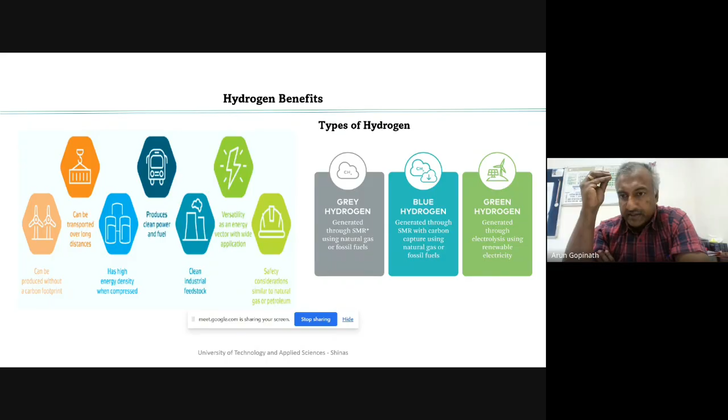But later on, with new techniques of carbon capturing schemes, they took SMR further, incorporating carbon capturing schemes into the hydrogen generation strategies. It is called CCUS: carbon capturing, utilization, and storage. If this technology is incorporated into the hydrogen generation strategy, such generated hydrogen we call blue hydrogen.

And the last one: obviously we know that if you want to call a hydrogen green, it should not contribute any carbon dioxide emission as such. That's why when we do electrolysis just with water, by giving DC electricity, you can do that electrolysis, and finally the outcome will be hydrogen as well as oxygen. This is the very green way of generating hydrogen. Now this hydrogen which comes out from the electrolytic process is very pure, with some water content or moisture content, but other than that, it is the purest form of hydrogen we will get.

If you look at the benefits, it can be produced without any carbon footprint. It can be transported over long distances as a gas or as a liquid. It has a high energy density when compressed as a gas, and it produces very clean power and can act as a fuel too, and it's a clean industrial feedstock. Industrial feedstock means it's not only for power generation, it can contribute to heating, industrial processes, and other things. So it's a very clean industrial feedstock, we can call it.

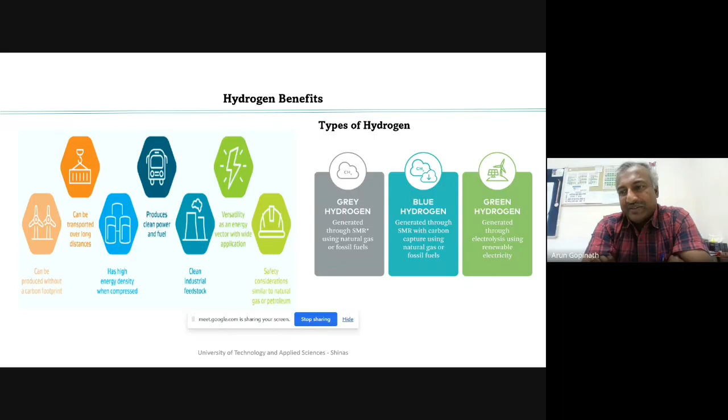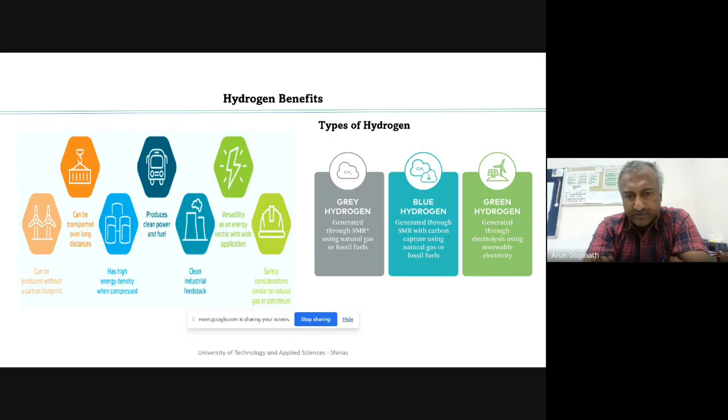The safety considerations are one of the burning topics we have to deal with. When hydrogen is there, it's highly flammable. So we have to follow safety considerations, and it is almost similar to that of natural gas or the petroleum products which we are dealing with now.

Now, sector-wise application, if you are asking, the hydrogen can be dealt with for the feedstock applications as well as the energy applications. As I mentioned before, it can be taken to the industrial process, just like petroleum refining, ammonia and methanol synthesis, or steel production. So that is the industrial process generally utilizing this hydrogen.

Another sector, as I mentioned, is the power generation sector. It can be used as a flexible power generation. It can be used as an off-grid power supply. And for large scale energy storage also, hydrogen can be a medium.

In addition to this, it can be converted to certain synthetic fuels, then ammonia, that is giving that flexibility. Then heating, industrial heating, as I mentioned before, that for residential heating, especially in the European countries, it can be an option. And in transport, as you may be aware of, fuel cell cars are getting available, and it is having almost a competition with battery operated electric cars currently. And this is all the happenings.

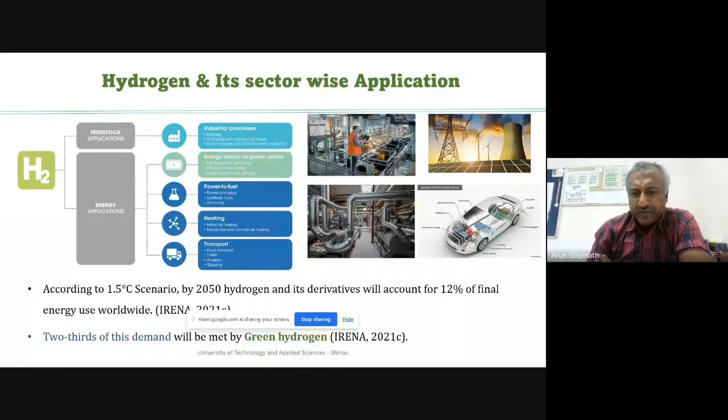To agree for the Paris Agreement, according to this 1.5 degree scenario, by 2050, hydrogen and derivatives have to account for almost 12% of the total energy usage worldwide. And out of that, it is expected that 2/3 of that hydrogen has to come from the green way, that is the green hydrogen. This is the 2021 IRENA report saying about this. So that is showing the importance of green hydrogen as well as hydrogen in the market.

Now this is in a broader perspective, so we can see the different hydrogen applications as a whole. Why? Because you might have heard about the hydrogen economy. This terminology is coming because hydrogen can be a fuel and it can govern the total economy of that particular state or region. So it is done by keeping hydrogen as the main fuel, and it is distributed with various applications.

For example, centrally the electrolysis plants has to be there, electrolyzers has to be there, and that has to generate that hydrogen. And there should be a supply chain, a water facility should be there, a logistics should be there. And after the generation, it can be taken as gaseous storage, liquid storage, or solid storage. It's possible, and it can be taken through tanks and through gas pipelines also, that transportation can be done.

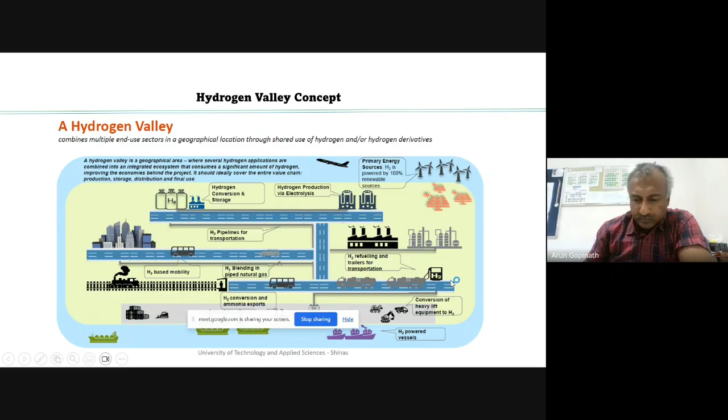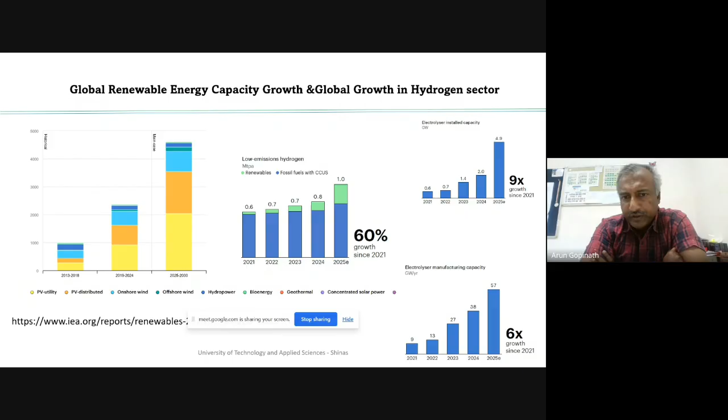And related to hydrogen also, improvement is expected to happen on the hydrogen side. So low emission hydrogen, when I'm saying low emission hydrogen, I'm including the electrolytic hydrogen as well as the hydrogen coming out from steam methane reforming, especially with carbon capturing schemes, that is CCUS. So you can see from the statistics that the component of hydrogen which was there in 2021 was just 0.6, in metric million tons per annum. So this was in 2021.

In 2022, it raised to 0.7 million tons per annum. Now in 2025, it is reaching 1 million metric tons per annum. So this is the growth rate.

If you are silently observing the growth rate, you can see one more thing. See this green side, especially the electrolytic hydrogen. This electrolytic hydrogen's ratio is also increasing. And at the same time, when we want this hydrogen, we need to increase the installed capacity of that electrolyzer. So the gigawatt capacities of the electrolyzer is also increasing gradually, and it is now currently reaching almost 9 times.

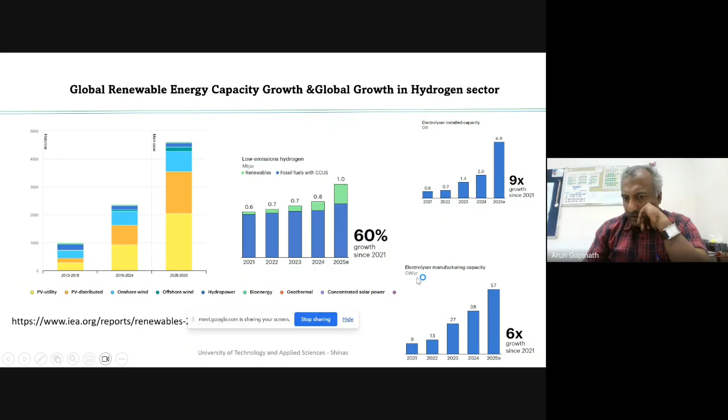Similarly, the electrolyzer manufacturing capacity also needs to be increased, and that is growing at a little bit slower pace, but it is also reaching almost 57 gigawatt per year.

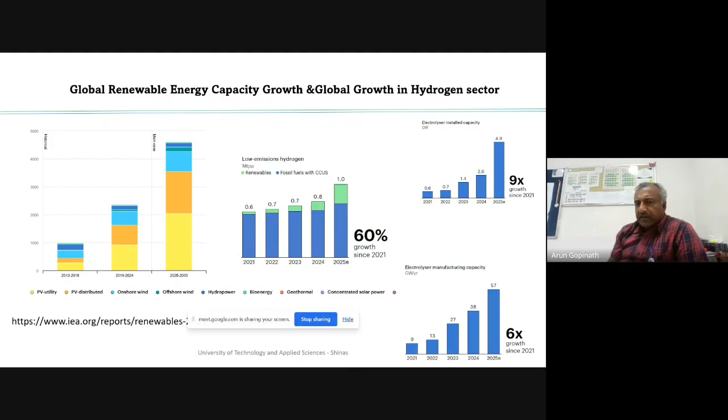Now, when it comes to India, if you want to attain the net zero emission objectives by 2070, we need to have our primary energy supply, almost 73% of the primary energy supply, generated from zero carbon sources, for example, renewable energy sources. So that is the main objective.

Once we are starting the statistics from 2022, why? Because in 2021, actually, we agreed upon the 2070 net zero emission objectives. So that's why the statistics are starting from 2022.

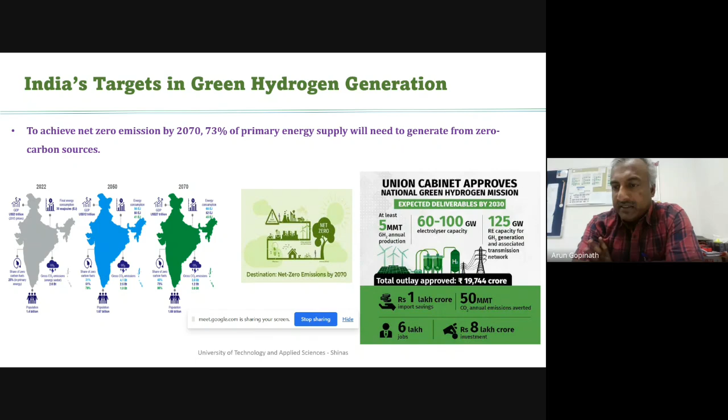And the transmission networks also need to be made, and the renewable energy capacity also needs to be made. For that, the renewable energy installed capacity has to be raised to 125 gigawatts.

Similarly, Oman also is having certain net zero objectives, and their target is a little bit early. India is targeting net zero emission by 2070, but Oman is targeting to keep it by 2050. This is also a little bit optimistic target fixing, but yet the country is trying for it.

Presently, if you are observing, the majority of the power generation as well as the energy consumption is completely from fossil fuels, as it's available in plenty in this region.

So they want to be the largest exporter of hydrogen in the Middle East. That is their aim, and that is almost by the announced project of 2022 from the IEA's, International Energy Agency's, global assessment. They are saying that Oman can be a key player in that hydrogen.

And the set targets of the country are at least 1 million tons of renewable hydrogen to be generated by 2030. And it has to be gradually increased to 3.75 million metric tons, and 8.5 million metric tons by 2050. So that is the country's target.

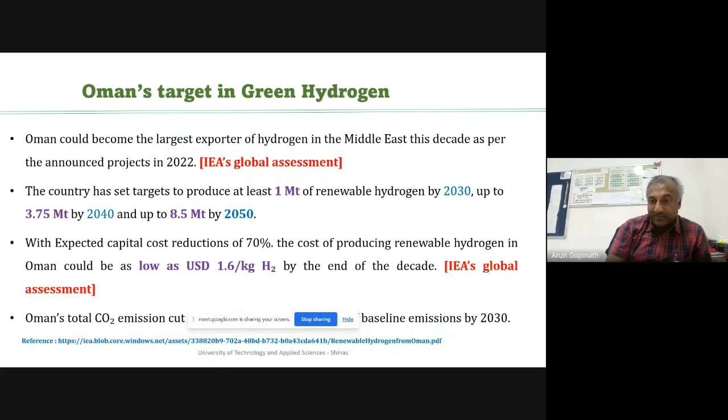So here the expected capital cost reduction of 70%, cost of producing the renewable energy hydrogen in Oman - when the capital cost is reducing, especially in components manufacturing, if a 70% reduction is happening, at that time the cost of renewable energy hydrogen can be $1.6 per kg. That is a projected estimation with a condition that 70% capital cost reduction has to be there. Then only we can achieve the $1.6 per kg hydrogen.

So now I'm coming to a case study of Oman. Here, the most available options of renewable energy are photovoltaic and wind. And photovoltaics has a good potential here. Why? Because it's almost 800 watts per meter square. You can get that autonomy for almost 8 hours in a day.

But there are some disadvantages also. Disadvantages in the sense that, for example, the dust is among the highest. And another thing, the cell temperature is also very high, especially here.

Especially in the summer, the temperature may go up to 55 degrees Celsius, and that is affecting the photovoltaic installations too. So it's having pros as well as cons, we can say.

The objective of this feasibility analysis was to find the most favorable location in Oman for this PV-wind hybrid system. Another objective is to check whether we can have a partial replacement or a complete replacement of conventional generation, and an optimal sizing for the hybrid energy system for that particular location.

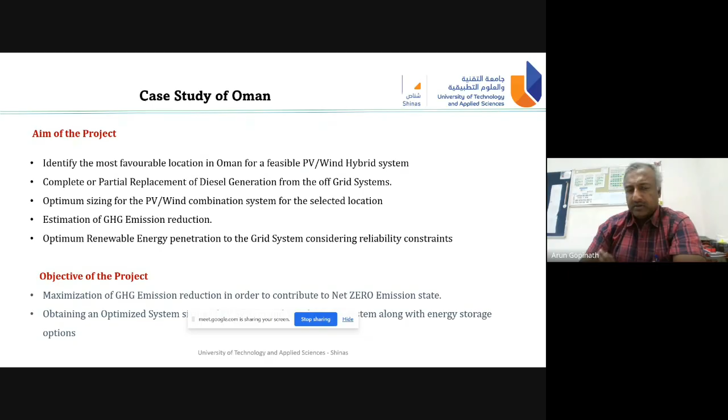The locations I selected for this study are these three. The Dhofar region - you might have heard about this region as Salalah.

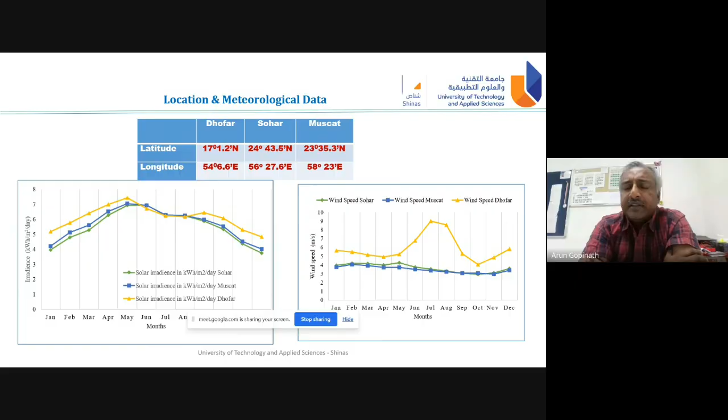So when I went through these three locations, what I found is the latitude and longitude we are having.

Once we are taking the longitude and latitude of these zones, we can get data in two ways - meteorological data through direct measurement is possible, or NASA's web data, which gives a very clear picture of the irradiance as well as wind speed in these regions.

I took both, and the results were almost comparable in both cases. So what you are seeing here is the irradiance data as well as the wind speed data of these three locations for the complete 12 months of that year.

We can see that the highest solar irradiance is happening especially in the Dhofar region, and at the same time even the wind speed is also high in that Dhofar region.

So in the further analysis, I took the most favorable location, and I went forward with that analysis.

After considering that particular location, I took the loads - the electrical load and the hydrogen load. The hydrogen load I took is 11.27 kg per day.

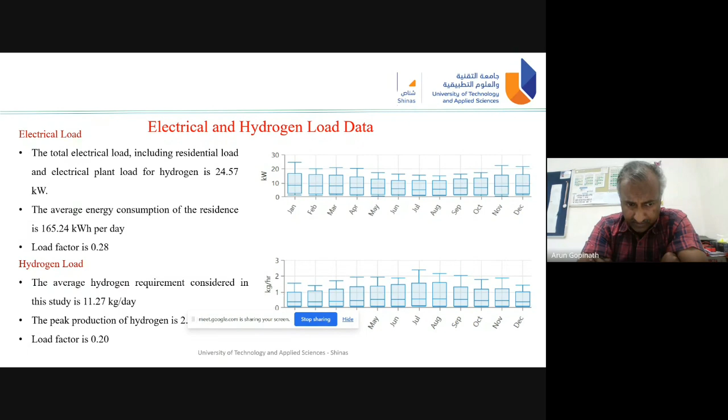Here we checked - we are having a fuel cell car called the Toyota Mirai, and its full tank is almost 5 kg, which means we can make almost two full tanks in a day. So that is the hydrogen load we considered.

For the analysis, the tool I used is a software called Homer Pro, developed by the National Renewable Energy Laboratory of the US, and presently it is acquired by UL, Underwriters Laboratory. Homer Pro is recognized as a global tool for optimizing microgrid design.

The main features of Homer Pro are that it can do optimization of hybrid systems, and it can do simulation of the hybrid system you model. Then the sensitivity analysis of the parameters you want is also possible. The cost analysis of that hybrid combination we can do, and the emission analysis of the hybrid system you are modeling can also be done.

And finally, the risk analysis - once it is feasible, which component is creating more risk, that we can identify, and how much risk it can cause. All these things we can analyze using this software.

Homer has its own inbuilt optimization algorithms, and in addition, if you want certain algorithms, that is also possible by linking MATLAB to Homer. For this analysis, I adopted a cycle charging as well as load following algorithm, which is inbuilt in Homer.

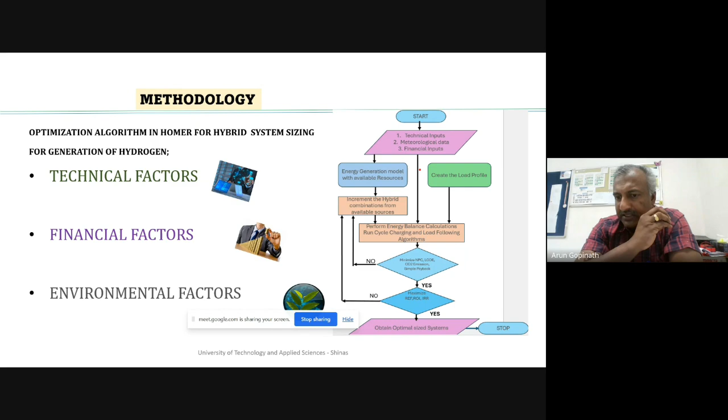The finalized feasible combination is given based on maximization of the renewable energy fraction, that is how much it can penetrate into the grid, and second, the return on investment and internal rate of return, then minimization of NPC, LCOE, CO2 emission, simple payback, and LCOH if hydrogen is involved. After that, once the cyclic algorithm is run, we get the optimal sized system.

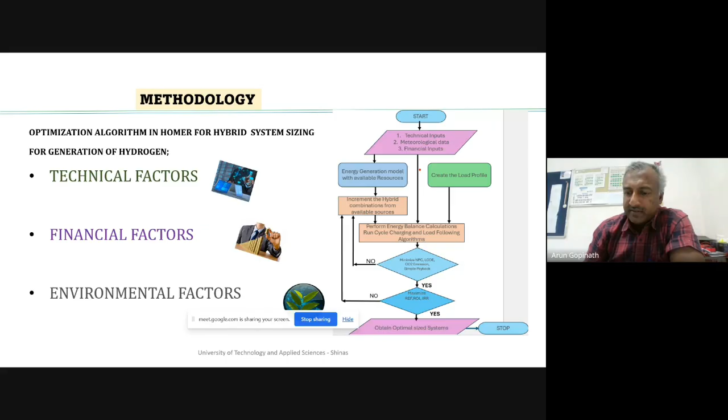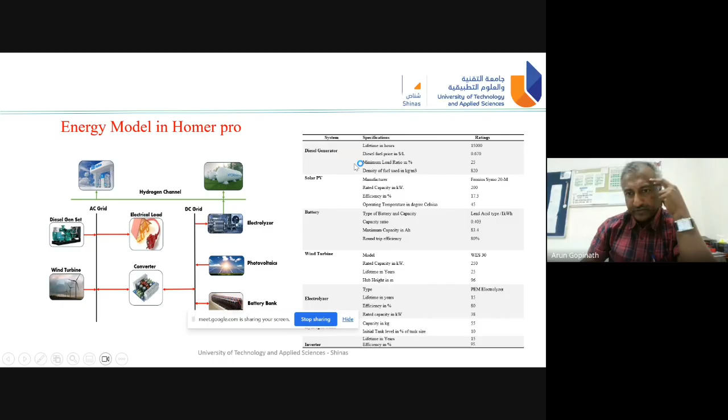And here is the electrolyzer component. So here we need to define the type and specifications of each component which we are giving there. So here are the specifications I entered: the diesel generator, photovoltaics, the battery, wind turbine, electrolyzer, inverter—all these specifications we can enter into the system to create the energy model.

In addition to that, we need to give the financial inputs to the model, because we need to do the financial analysis. So for each component, the diesel generator, I kept the capital cost as $250 per kilowatt, based on how much kilowatt rating you are using. Similarly for the photovoltaics, we need to give the capital cost, the replacement cost, and the operation and maintenance cost. These are the costs I am giving.

The cost can be given in two ways: one is from the existing market, the available prices, or from existing case studies if you have them, otherwise from the literature. So I depended on both cases—I checked both the literature cases as well as the existing ones. It was found very similar, and that's why I used that. Especially literature from this region will give values closer to reality.

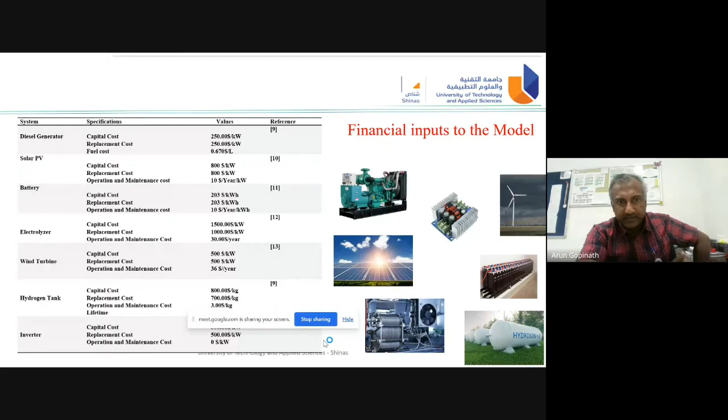As I told you, the various combinations I tried: first, the base case of diesel generator alone. Second, wind and diesel generator, then wind, battery and DG, photovoltaics, wind, battery and DG, photovoltaic and DG, and PV, wind, DG. So 9 combinations I found that are almost feasible.

The electrolyzer tank capacity I took is 38 kilowatt, as you can see from here, and the hydrogen tank which I opted is of 55 kg capacity.

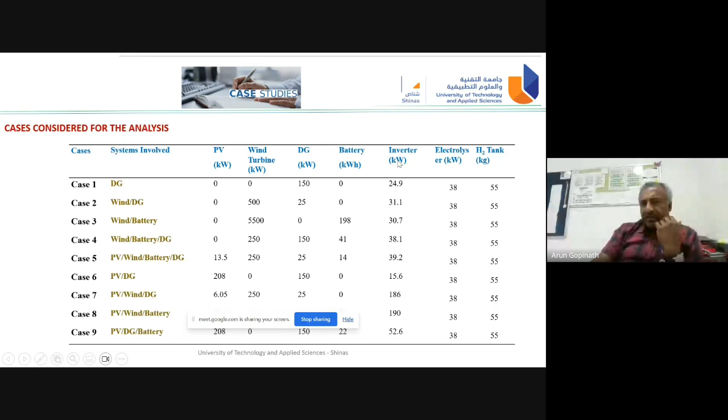When I run this simulation, we can find out the optimized sizing rate of each case, whether it's PV, wind, DG, battery, or inverter. We can keep it for the Homer optimizer and get those values. In two ways we can do this: as a Homer optimizer, or otherwise we can define those values and keep them fixed and then check the feasibility. Both possibilities are there in Homer.

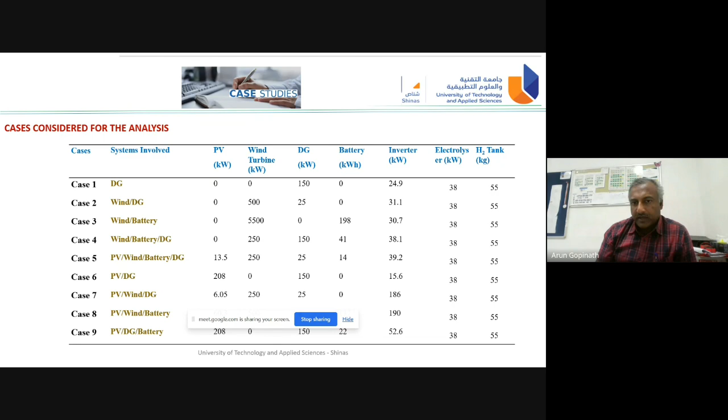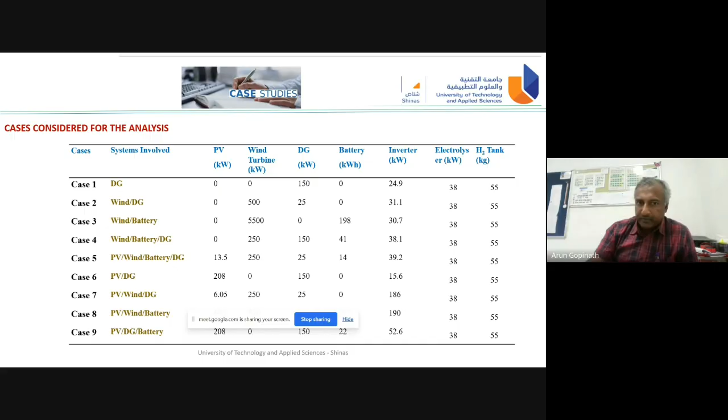So here we can keep four components in the optimizer, and the remaining things we have to define. That is the option. If you don't want to optimize by Homer, and if you can define the things, that is also fine. So here I opted for the Homer optimizer in this case, because I need to know whether this system will be feasible and whether Homer can give the optimized results on it.

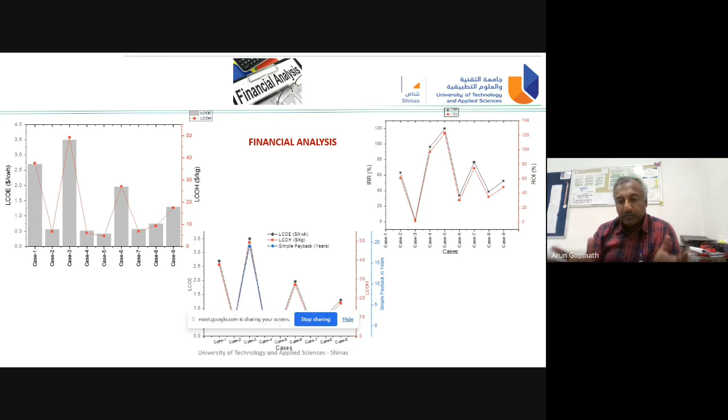Now, when observing the financial analysis of all these cases, what we can see is case number 5, which we have to note for the levelized cost of energy - how much dollar will be coming per unit of generation. LCOE, don't take it just as cost of energy; it's taken as cost of energy, but in a broader perspective, considering the total lifetime of that particular project, and in that lifetime, whether there's any replacement required, any operation and maintenance cost - all these costs it will consider and give that particular parameter, the levelized cost of energy. So it is a very comprehensive value which we get there, and that is the marked parameter which can be taken for cost fixation.

So you can see here the case number 4 and 5. Case 5 is the lowest, which is having the LCOE. And if you are observing these things, the IRR and ROI, the return on investment as well as the IRR, these two are the financial parameters. If it is high, that project will be more feasible. So in this case, we can see that case number 5 is high, especially for IRR and ROI, and the LCOE is really low. So this is giving an indication that case number 5 can be a very feasible combination.

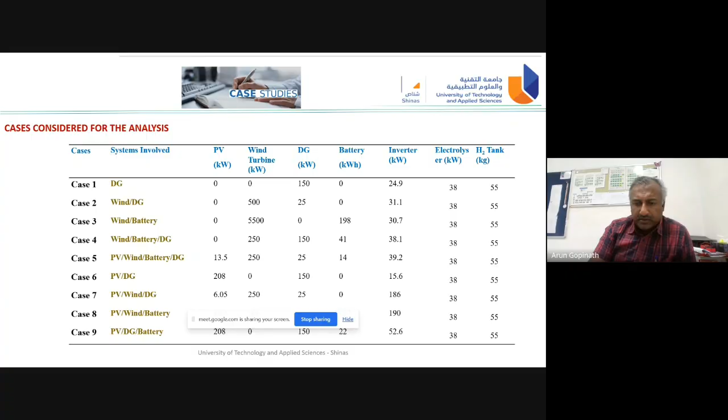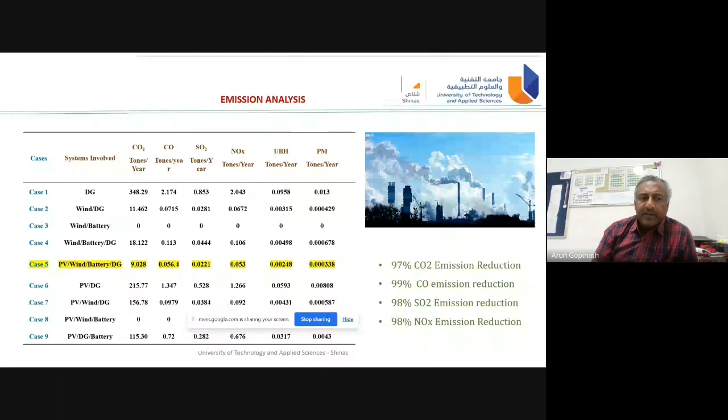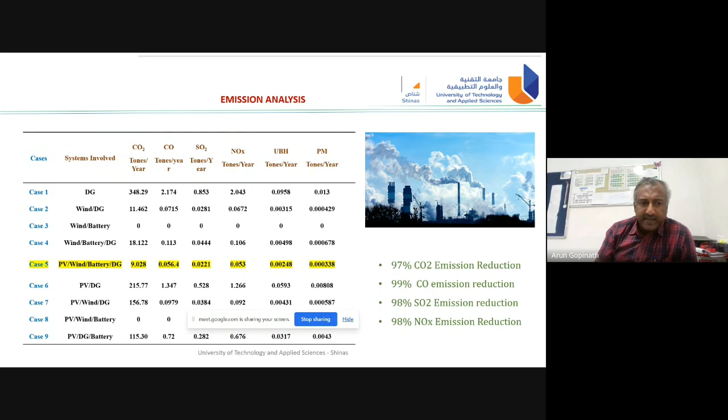And it is significantly reducing 97% of carbon dioxide, and carbon monoxide it is reducing by 99%, comparing to the base case I am telling. And 98% of sulfur dioxide emission it's reducing, and NOx emission also it is reducing by 98%. So this is giving an indication that case number 5, that combination, can be a well fit for this particular case.

So this is what I put forward in this one, and the LCOE of the system for meeting the energy demand is 0.41, and the levelized cost of hydrogen which was getting from this project, it was at the rate of $4.65 per kg.

This is a very reasonable LCOH in this region, and I compared it with the various LCOHs which we were receiving from the various zones in Oman. That is all compatible, and it is saying that these results are on par with the analysis which they are doing.

Now, this is the paper which I published in 2025, actually in January. This is available in Springer Nature, in the journal Interactions.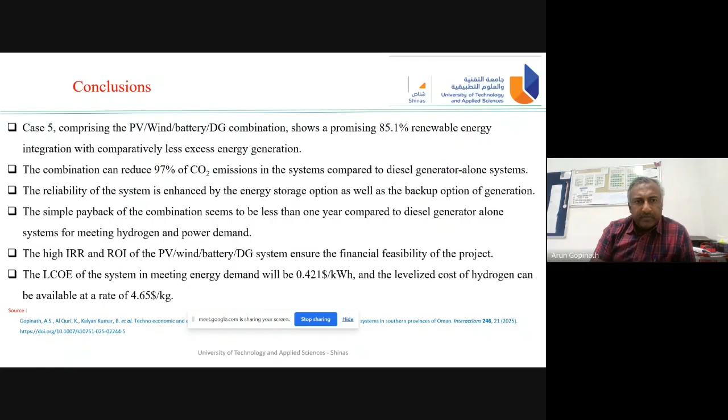So now from this, I am taking forward to the future directions and initiatives which we can take. The future directions and initiatives in green hydrogen, especially all over India—they identified 17 particular locations in which they can go for this green hydrogen. And as I mentioned before, it will be starting from some pilot projects, then it will be moving to hydrogen valleys, and later on it will be moving towards a hydrogen ecosystem in a very broader perspective.

So this is a document which I got very recently, the Kerala Green Hydrogen Valley Vision 2040. This is comprehensively giving the ideas of how a hydrogen valley can be, and what are the components and how this can be incorporated. Some of the issues are also there in green hydrogen that I will discuss after telling about these particular points. So before that, we will see the Vision 2040 of Kerala Green Hydrogen Valley.

Here they are trying to make use of, as I mentioned before, hydrogen for the industrial process. In Kerala, what they are targeting is 120 kilotons per annum consumption. This possibility is there in the industries.

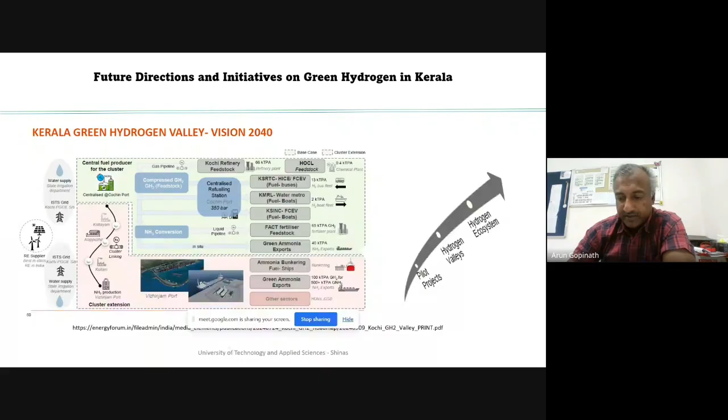Now, another problem which is there in the power sector, I just want to address, and you people can also see this problem in the newspapers. I saw this one in Mathrubhumi as well as in Kaumudi.

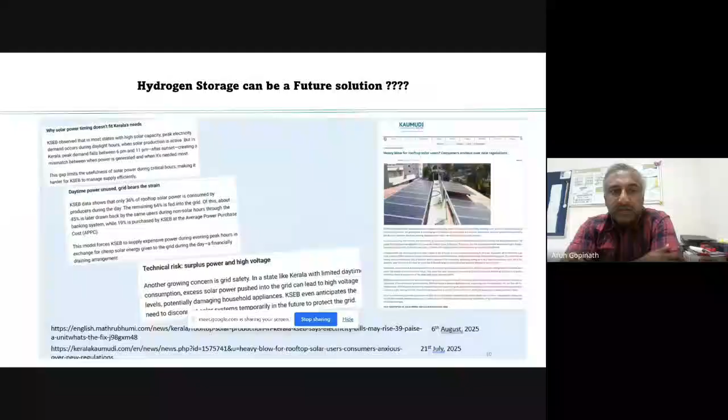What it was saying is that presently for the rooftop installations, KSEB was giving monetary benefits to the people. So with that, huge installations started coming in most parts of Kerala. After that, what they found is that the power from the photovoltaics is at its peak during the daytime. But in the night time, that is the peak time in which the grid needs power, especially from 6 p.m. to 11 p.m., and during that time they are not getting the power from this, so they have to give it to the houses.

So this problem was there. And finally they were coming up with ideas that those who are having rooftop solar power should have battery backup too. So this is a temporary solution, I feel. But the surplus power coming into the grid can create so many other issues, just like high voltage increases in the system, temporary failures, unwanted heating, and it can even affect the grid parameters sometimes. All these possibilities are there.

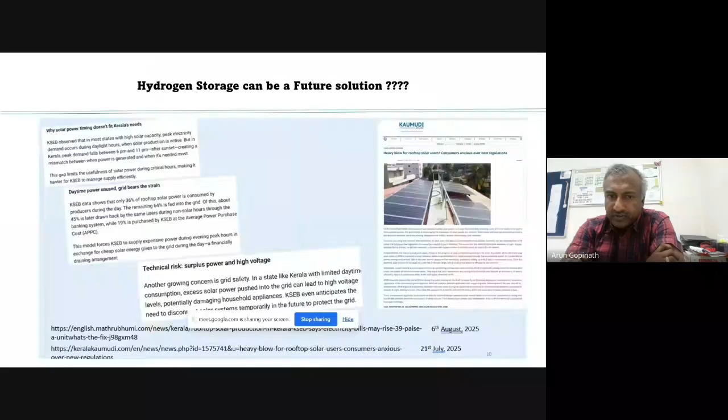So from green hydrogen, can we come up with a solution? This is the question I just want to throw to you. What I found from the literature is that there is a possibility. The battery can be a short-term storage, and in addition, if there is excess energy coming from renewable energy, it can be stored in the form of hydrogen. But what is the possibility, how it has to be taken, and how it has to be taken to the planners and economists? That is a broad problem, it has to be solved. So this is what my presentation is going to be about.

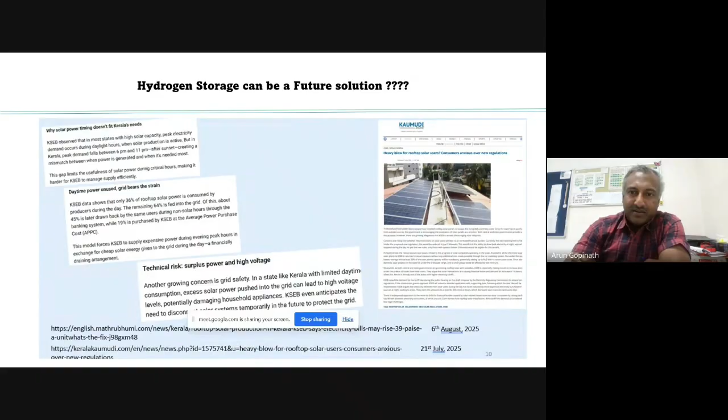My references which I took for the case study as well as for this analysis, I am keeping them here. Thank you, and I'm welcoming you all for the discussions.

Hello. Hello. Wait a minute, sir. Hello, sir. Ansel has raised the hand. Please ask the question, sir.

Hello sir, am I audible now? Yes sir. Sir, actually regarding the hydrogen valley, I think for the past few years we have been discussing this hydrogen valley project and everything, sir. But still what we are facing is the system integration part, sir, and that's my first query, because till now we are not able to have a clear picture of how to address this issue. And second, sir, when you were discussing the emission analysis part, you told the best result was when you're giving a combination with DG, right?